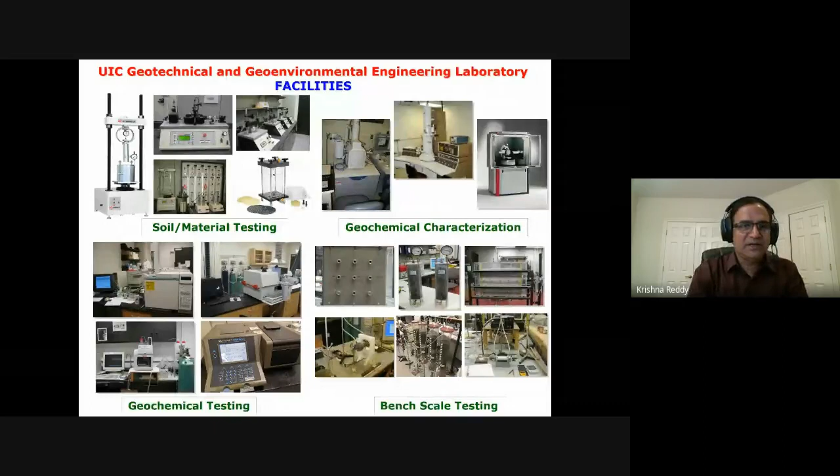This is my lab. We have all kinds of material testing equipment, and all the credit goes to my students. Over the years, I worked with many students from different parts of the world, and their hard work is what contributed to my accomplishments.

So this biochar—I don't know how many of you have heard about it. Biochar is becoming a very popular research topic these days. I just pulled this from Web of Science yesterday—look at the number of publications being published. In 2020, there were more than 4,000 publications on this particular topic, just for biochar, and this number might even increase this year. If I combine the topic of biochar and soil, you'll still see a substantial number of papers, just using Web of Science. If I use Google Scholar, this will be 3 or even 4 times as much.

So the point I wanted to convey is that this is a hot topic these days. And who is doing research? Mostly environmental science, environmental engineering, energy, fuels, chemistry, biotechnologies, and also the world of green and sustainable technologies. So it's a hot topic.

So you want to know what this is all buzz about, right? What is this material, and you want to know something about it. So I want to give you that idea—what is biochar, how it is produced, what are the properties, and what are the typical applications of this material. Then I will go into environmental remediation applications through our research projects. I saw that this conference covers a lot of different fields—you have environmental, water resources, geotech, and everything.

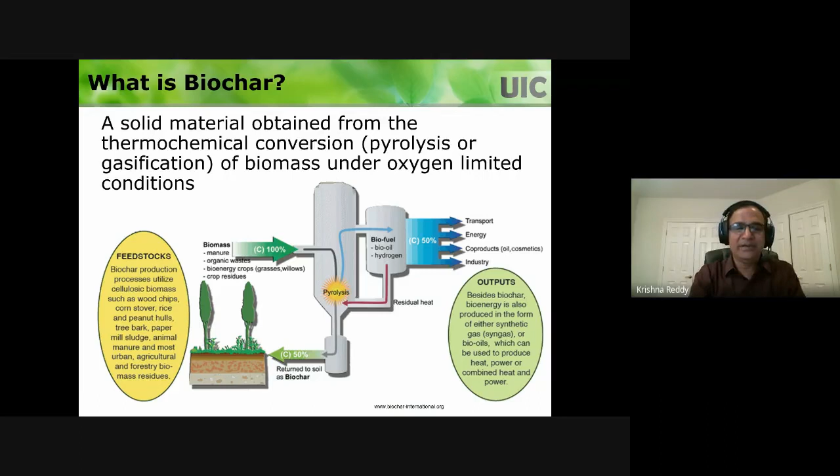Basically, you have a biomass, put it in this pyrolysis unit or gasification unit, and heat it up with no oxygen. So you get a bio-oil or syngas, producing bioenergy, which is good — from the waste, you are creating energy. As a result, you get the so-called biochar or charcoal. But it's not a waste — it's going to be a very useful material for many applications. That's what the focus is.

You can learn more about pyrolysis if you're interested. These are more controlled units — kilns or retorts. You put in your biomass and heat it up under no oxygen conditions. There are two ways of doing it: fast pyrolysis and slow pyrolysis. Fast pyrolysis is high temperature and low residence time. Residence time is how long you keep your biomass in the unit and at what temperature.

So fast pyrolysis is high temperature, low residence time, and slow pyrolysis is low temperature, high residence time. Gasification is another way of creating biochar — you have a vessel and directly heat it up. There is some presence of air, but if you can heat it up while limiting the oxygen, you'll get more biochar out of it.

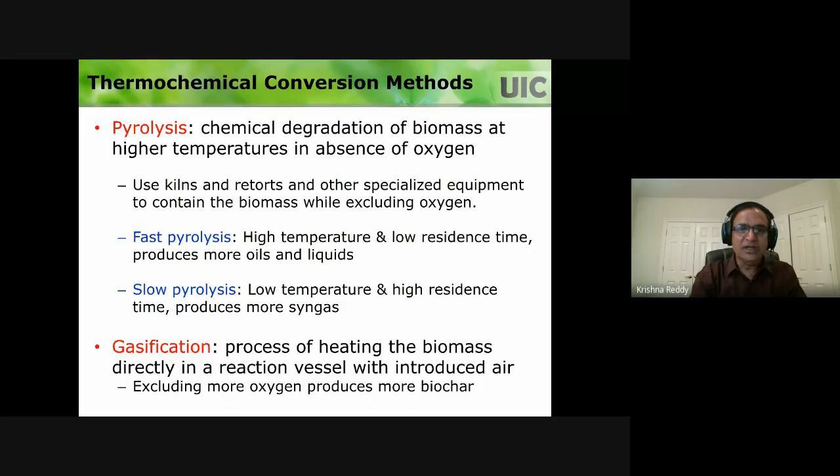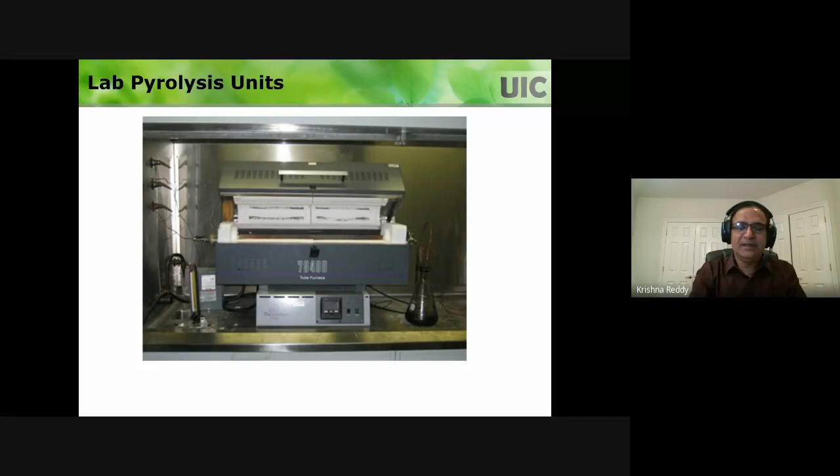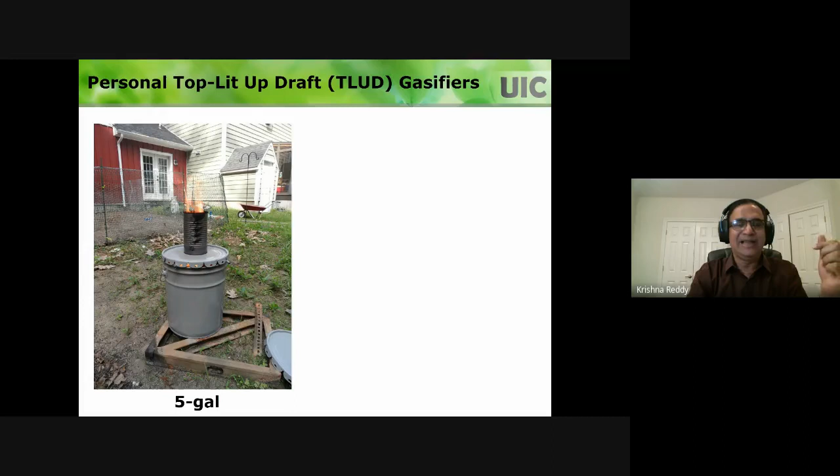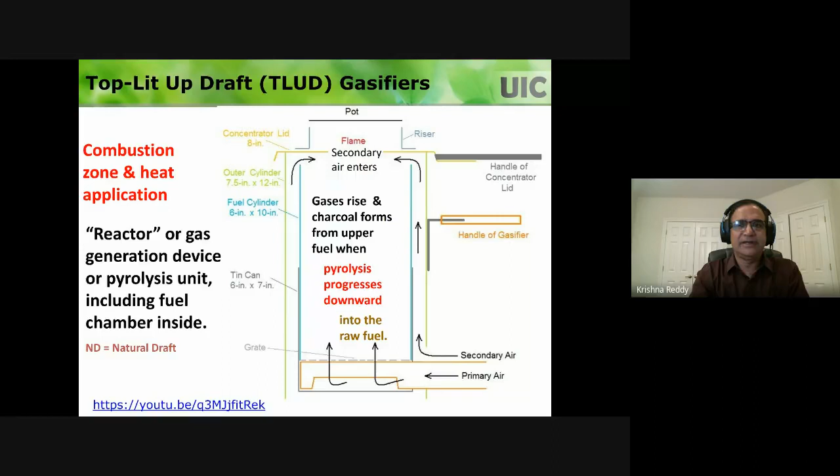You can actually create one yourself — basically it will have concentric cylinders, and you put your biomass inside, then circulate the air and light it at the top. What happens is the biomass doesn't have oxygen, or has oxygen limitation, so it converts to charcoal rather than ash. If you're interested, you can learn about these personal pyrolysis kilns — you don't need fancy equipment. You can make one yourself with basic stuff available locally. This concept is also used for cook stoves.

It's very nice because instead of burning wood and getting ash and a lot of smoke, if you follow this pyrolysis methodology, you get a lot of heat out of it, there's no smoke, and at the end you get charcoal. Charcoal can be used for a lot of other purposes. So there's a lot of emphasis on using this kind of stove in developing countries, and a lot of work going on in that field.

So when you talk about biomass, what are we talking about? Anything biodegradable — literally anything: products, waste, residues. Think about agricultural residues, corn cobs, corn stover, rice husk, rice hulls, peanut hulls, animal manure, yard waste, animal waste, industrial waste, municipal solid waste, any other byproducts that have organics in it. Literally anything that's organic and is a waste. This is the best way that waste can be converted into energy.

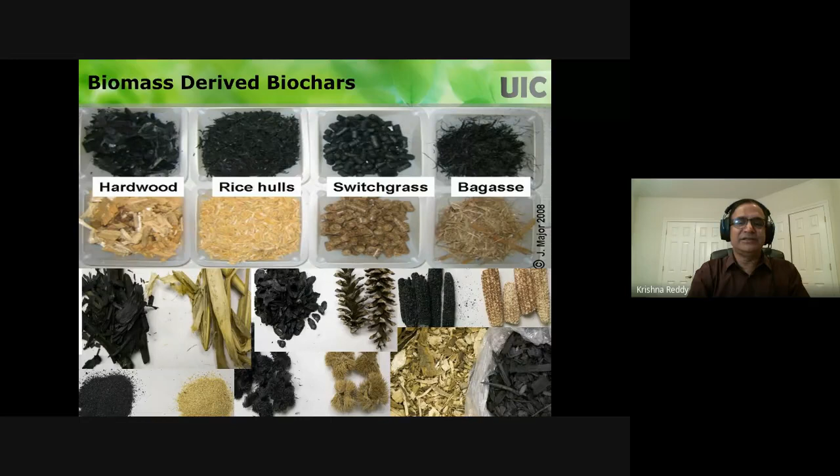These are pictures of your biomass, and the dark black stuff you see is what it looks like after pyrolysis. The problem with biochar is there is no standard biochar — no standard properties, no standard composition. The yield, how much biochar you produce, and what properties that biochar will have, will vary drastically depending on what kind of feedstock you're using and what kind of production process — slow pyrolysis or fast pyrolysis, gasification, what temperature.

These are all the controlling factors that dictate what the end product is. You could literally have hundreds or even thousands of different types of biochar possible. So when you read a paper about biochar, you need to look into the details about what that biochar is all about. You cannot really get the same results if you try to duplicate a biochar that may be different than what the original researchers used. So beware of these biochars — that's the misconception people have. They think all biochars are the same, but biochars can be of many types, so you really need to think about this seriously if you're working on biochar.

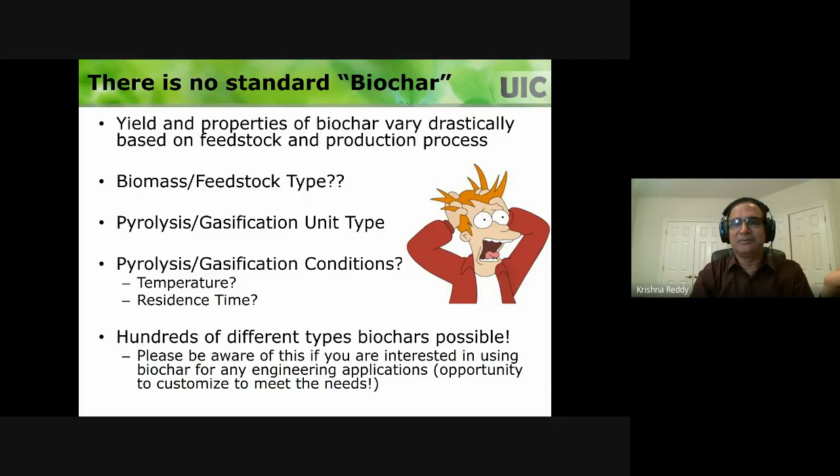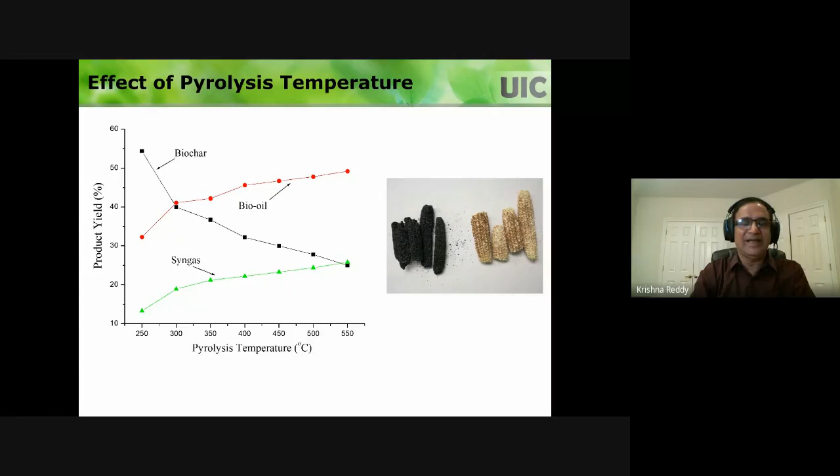Just as an example, I'm showing you the effect of feedstock. If you use different feedstocks with the same pyrolysis process, same temperature, same residence time, you get different yields — that's a problem. And if you increase or decrease the temperature, the yield is going to be different too. When you have these different temperatures and residence times, the properties of the resulting biochar are going to be quite different.

So the first thing you need to do, if you're interested in researching biochar or using it for any application, is to characterize it. In our research, we focused on waste wood as a feedstock, and also on commercial production, because you can do lab-scale generation of biochar, but that's not realistic since in civil engineering applications we need large quantities. When you want large quantities, you have to go to commercial plants.

So we really didn't want to do anything with producing biochar in the lab. So we wanted to use commercial facilities to obtain our biochar from there.

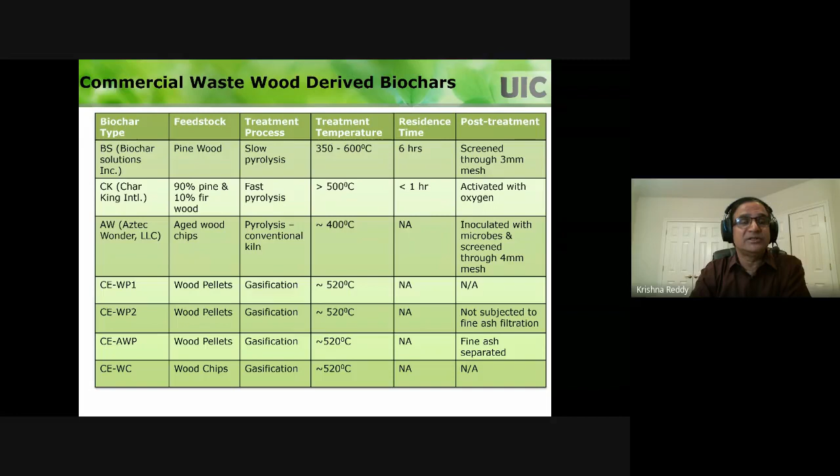We found sources where they use pine wood, waste wood, as the feedstock. We don't have any control on how they create this biochar, but we got some information from these commercial producers on what the conditions are. Then after they produce the biochar, sometimes they post-treat it, so you have to look at that too.

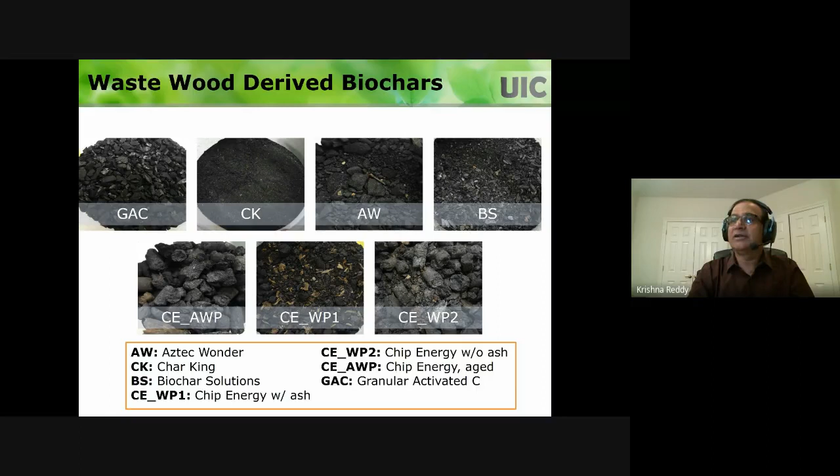These are the biochars from the same waste wood, and they look different in terms of appearance. So look at this. Also for comparison, I put a granular activated carbon here so you can look at how they compare.

If you want to characterize them, you can follow the standard ASTM methods to know the physical, hydraulic, and chemical properties. You can do SEM imaging, and then more detailed porosity and surface area analysis. We're all familiar with these things.

You can do grain size analysis, and the sizes can vary significantly depending on how the biochar is made. What I'm trying to show here is the same biomass, waste wood, but different commercial producers following different production processes. You can see the specific gravity being different, water holding capacity different, organic matter content different, fixed carbon content different.

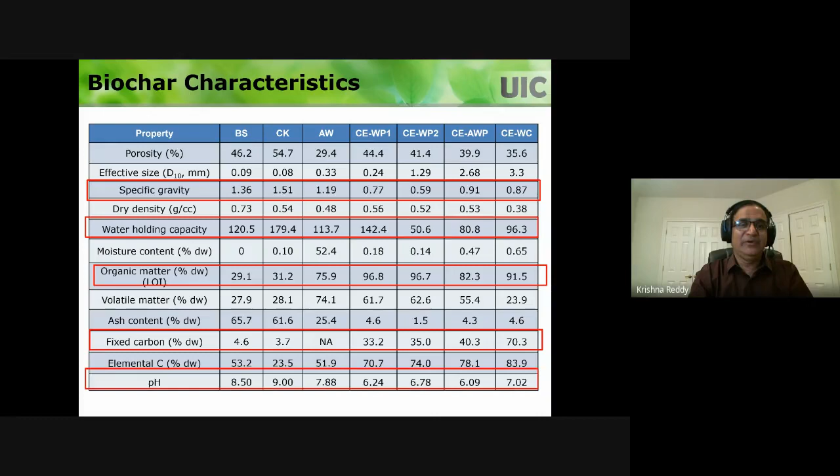You really need to pay attention to these variations. Even though the biomass is the same, the production processes are different. Here, the water holding capacity, one of them has 180%, the other has hardly 50%.

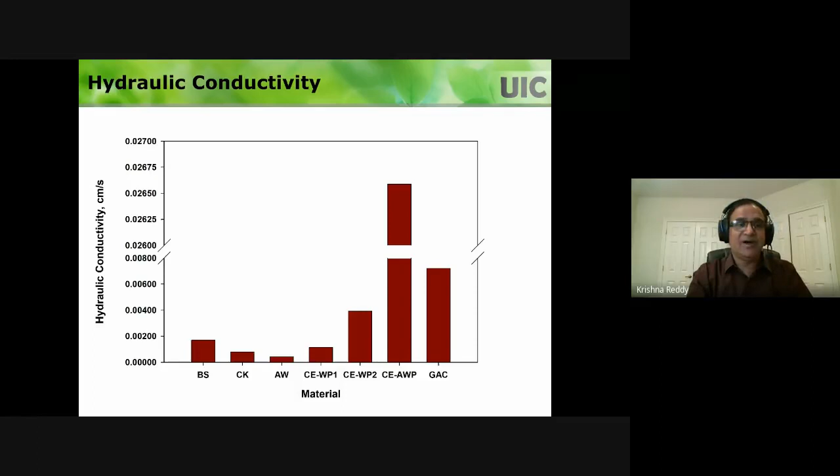Hydraulic conductivity: generally they are more like granular type material, so they will have high permeability. No matter which biochar you're looking at, hydraulic conductivity is very high.

You really need to look at what is the water content, what is the volatile matter, what is the ash content, what is the fixed carbon. What you have to look at is the biochars that have more fixed carbon, those tend to be the better biochars.

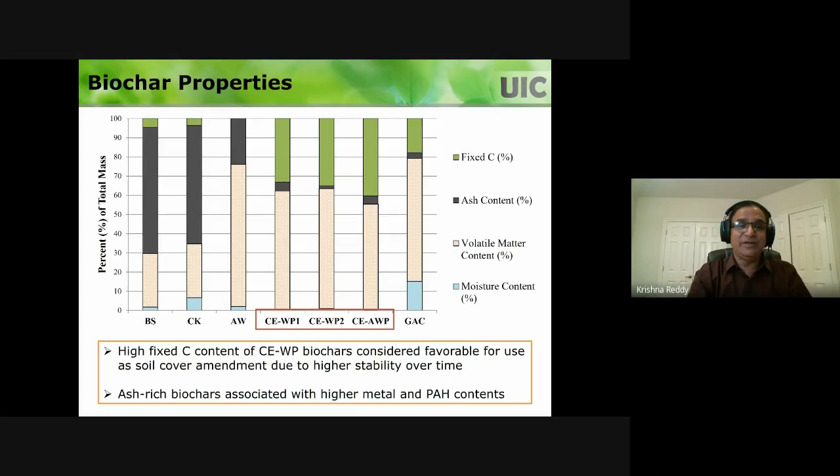If you have more ash, like you see, those are dangerous. They could have a lot of contaminants, metals and PAHs that a lot of people don't pay attention to.

You really need to characterize the chemical properties such as pH, ORP, electrical conductivity, zero point charge. But more than that, you need to also characterize what kind of toxic metals and toxic organics they have. That's very important because you don't want to use a toxic material in your application.

A lot of times you assume your material is inert, like if you're using sand, gravel, or clay, you're not concerned about these contaminants. But when you're using biochar, depending upon the biomass and the pyrolysis conditions, you're going to have these contaminants, and you need to characterize those things.

A lot of times you may use this biochar by mixing it with soil in your applications. When you have a soil with certain properties, you add biochar in different amounts, let's say 2%, 5%, 10%. Generally we go maximum up to 20%, and you are going to change the characteristics of the soil. For example, organic content is going to increase.

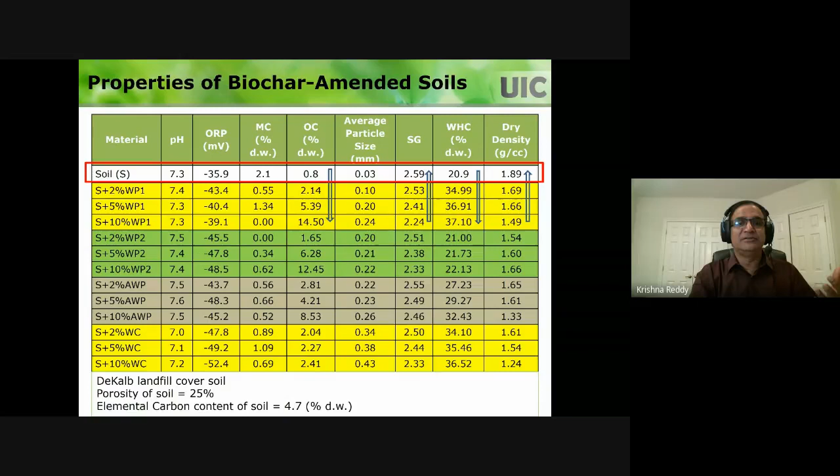On the other hand, biochar is a lighter material, so your specific gravity is going to decrease. Water holding capacity is going to increase, so dry density is going to decrease. So you're changing the properties of your soil, and it depends upon which biochar you're using. Again, those properties will change.

Geotech people love characterizing the geotechnical properties of biochar and biochar amended soils. You can do the Atterberg limit test, you can do compaction tests, and you will find some strange results with these things.

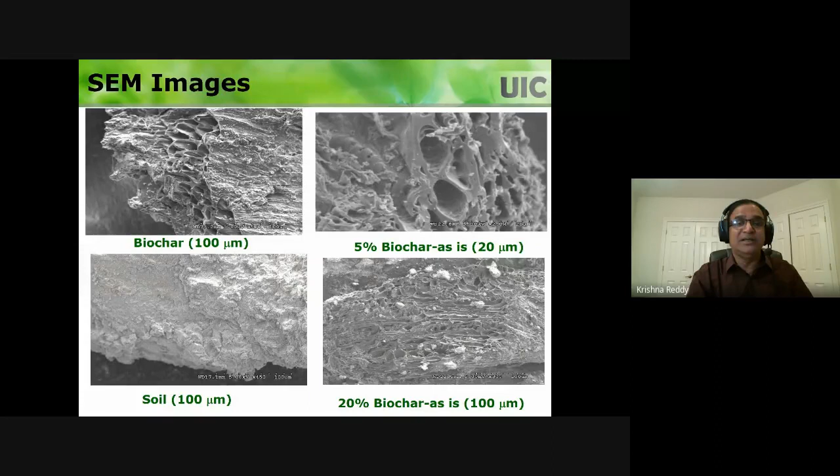When you add it to the soil, you're going to create that internal porosity that you would not have with the soil alone. And hydraulic conductivity: if you're dealing with a clay soil, hydraulic conductivity may be low, but when you add this permeable biochar, hydraulic conductivity is going to increase.

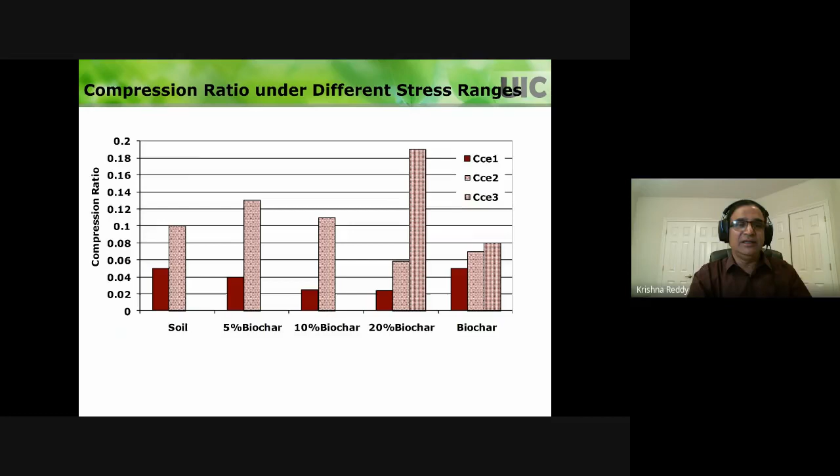So you need to really pay attention for your applications. In case of compressibility, generally biochar is more compressible than the soil.

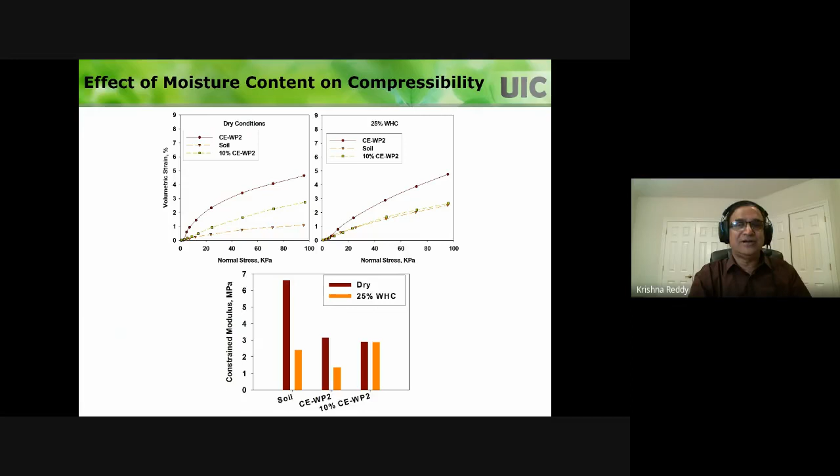In terms of shear strength, surprisingly, biochar has a higher shear strength, and even if you add this biochar to the soil, the shear strength is going to increase. That's a positive aspect. But moisture content makes a lot of difference. If you test dry biochar versus moist biochar, you will get different results. Generally, when you have moisture content, the strength is going to decrease. So you need to have those properties at hand when you think about biochar applications.

And there are many biochar applications. Agricultural applications are very common, so it has been used extensively as a soil amendment in agricultural fields. That has been going on. But just recently, a lot of attention has been drawn to environmental applications and also infrastructure engineering material applications. So soil-based stabilization, you can add it even into concrete. You can think about anything you want to do with this material. But the applications depend upon matching your application needs with the composition and properties of biochar.

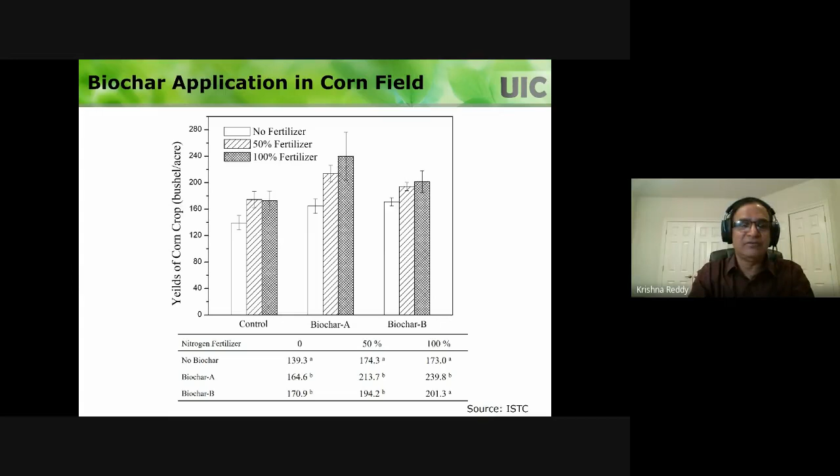So biochar agriculture application is very straightforward. You just basically go to the field, add your biochar to the soil, and grow your crop the regular way. Then at the end, depending upon the biochar that you use, your crop yield is going to improve. This has been going on, and the farmers love it. So the major applications of biochar so far have been in farming.

But as I said, this material being unique with a high internal porosity, a lot of people are starting to look into these environmental applications and infrastructure applications. We have been working on this for many years. We did some projects on nutrient removal from wastewater and stormwater treatment, contaminated soil remediation, and fugitive landfill gas emissions. All these applications become sustainable because you're using biochar, which is a sustainable material. You're doing waste reduction, conservation of resources, pollution control - all those benefits you get. So truly, whatever you do with biochar should eventually lead to a sustainable solution.

So I want to show you just a brief glimpse of these research results. I'm not going to go into details, but hopefully you can get more information from the publications that I have. There are many studies in the literature that look at using biochar to remove nutrients and other types of contaminants from wastewaters, using biochar as the adsorbent.

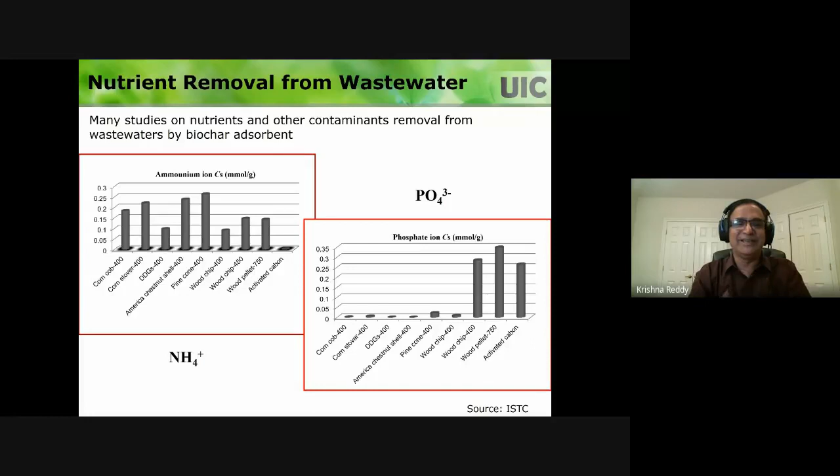I want to show you this one. Ammonium is the one that people want to take out, and depending upon the biochar, you can take out different amounts of ammonium. Activated carbon is not doing a good job, but your biochar is doing a good job - that's the advantage. And phosphate is hard to take out, but you can find biochars that can do it. So don't give up - if you have a biochar that does not work, you could think about another biochar that could do this thing. You have a lot of flexibility because you can create many different types of biochars, and hopefully one of them will work.

So if it works, then you need to look at the kinetics - how much time it takes to uptake the contamination - and also what is the maximum capacity that it can take. These are the things that people have looked at.

And our project is kind of interesting. I had a student from China who is interested in looking at biochar, and we created this project for him: why don't we use the biochar to remove the nitrogen, phosphorus, and potassium? These are the kind of nutrients you find in wastewaters. Phosphorus is the one which is hard to take out by biochar, so we wanted to add MgO, magnesium oxide, which combines with phosphate and forms struvite. We wanted to look at a combination of biochar to remove these other nutrients, and for phosphorus, maybe we can use this MgO.

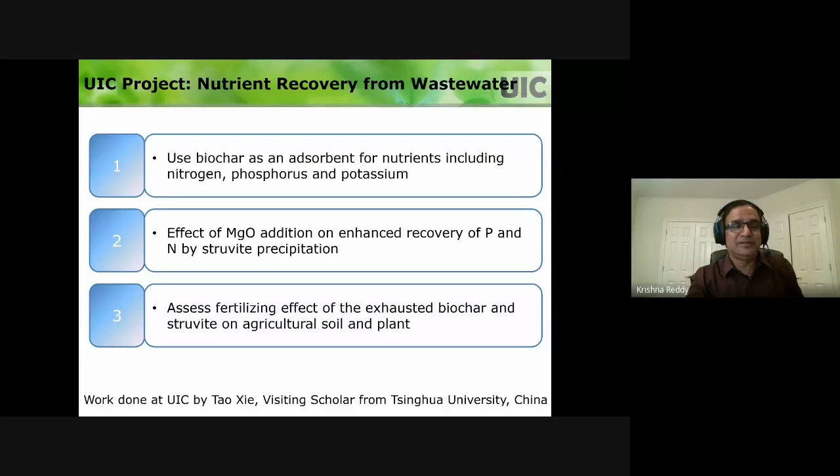Maybe once you have this material absorbing all these nutrients, why don't we take that and spread it in the farm fields? Now you are using this biochar with a lot of these nutrients, and you're going to get a large amount of crop if you use this situation. So that's what we wanted to see, if this is feasible or not, because if you use the biochar just like that, you can get some benefit, but not as much benefit.

By doing this, you are removing the contamination from the wastewater, you're cleaning it up, and also you are using the biochar with nutrients in farm fields that can give you huge yields.

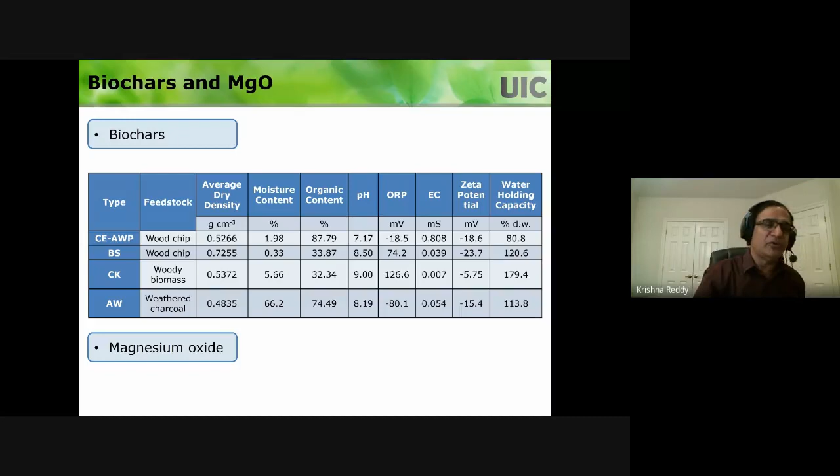In the lab we use synthetic wastewater. We looked at different types of biochars that I mentioned before, all wood-based biochars, and we looked at magnesium oxide to form struvite. I don't have time to go into the chemistry of this struvite precipitation, but if you add magnesium oxide, you get these reactions and form this precipitate.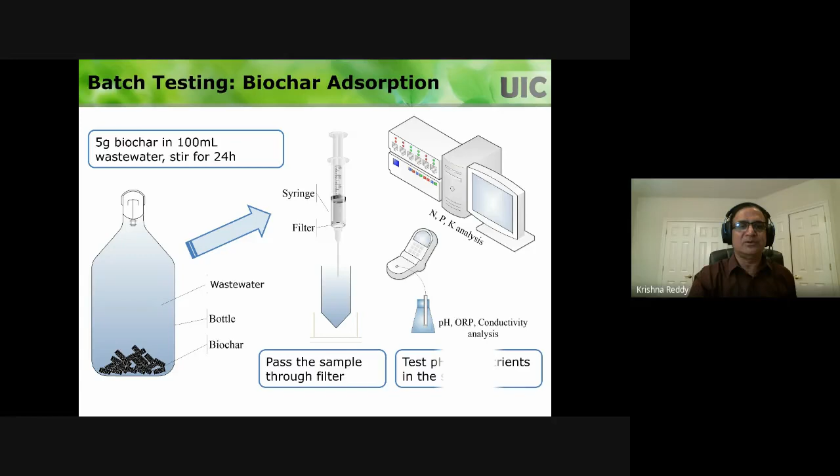Our experimental procedure is very simple. Basically, you take the wastewater, add some biochar and mix it, then take the solution and see how much contamination is reduced. Because some of the contamination gets adsorbed onto the biochar, you'll have less in the solution, and we analyze how much reduction you have.

When we want to add magnesium oxide, we do the same thing. We add biochar and magnesium oxide and look at the concentration.

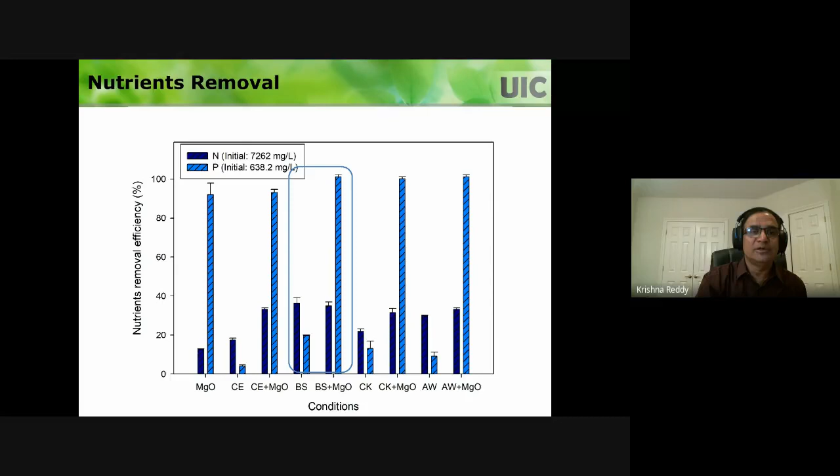So here are the results. If you look at magnesium oxide alone, you can take out the phosphorus, but for nitrogen you need the biochar. Based on these results, biochar BS and BS plus MgO are found to be very efficient in taking out both nitrogen and phosphorus. Then you can optimize what should be the ratio of biochar and magnesium oxide, since we're going to use both, so in what proportion can be optimized.

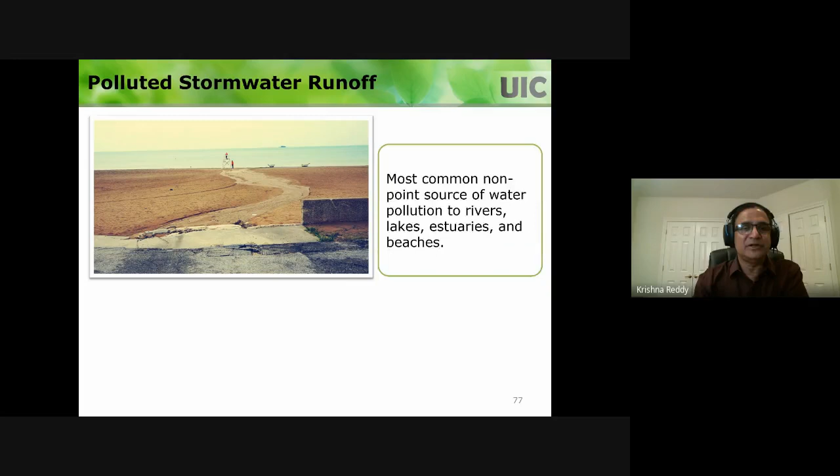The stormwater in cities is a huge problem. When it rains, all the contamination from the roads and everything goes into these waterways. In Chicago, we have this lake, and all the contaminated surface runoff goes into the lake and contaminates it. This surface runoff can have a lot of different types of contaminants.

So the idea is, can we have an in-ground filter system that water can go into, and then you have clean water that can be discharged into the lake. In this case, what kind of filter media do you need to use? Our question was, can we use biochar as a filter media?

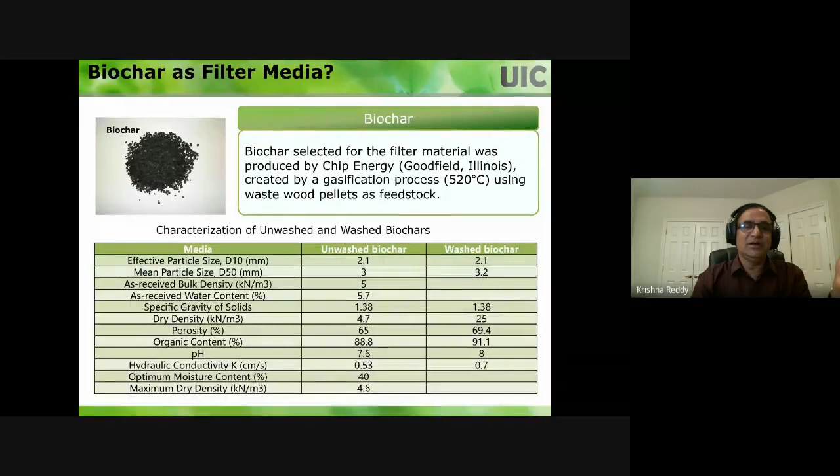So we tested this on a synthetic stormwater that contains nutrients, metals, PAHs, and even biological contamination, E. coli. Basically, we do column experiments, which kind of simulate the filter response. We can look at how much you're putting in and what is coming out, and based on that, calculate how much of the contamination is being removed.

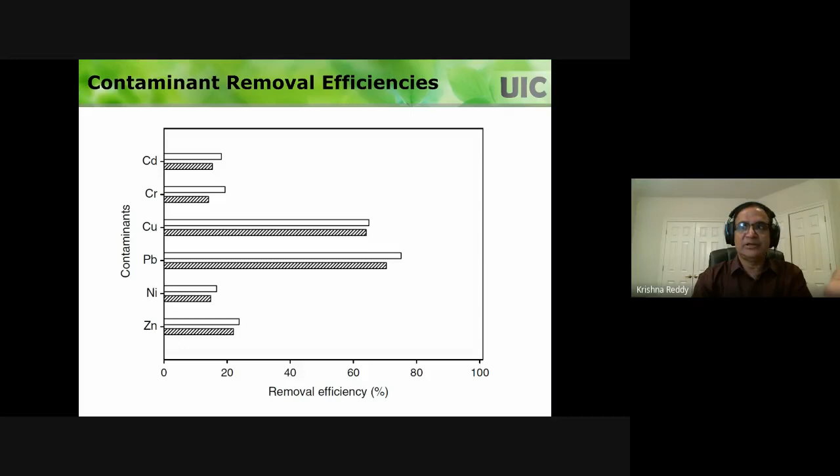So you can see it can remove a lot of different contaminants, which is really good. Among the metals, some are removed more, some less, but the removal efficiency of this biochar is very substantial, which is really good for using it as a filter material.

In case of remediation of soils, one of the techniques we use is phytoremediation, basically growing plants so they can uptake the contamination from the soil. They can stabilize the contamination within the soil in the root zone.

But it does not always work. Sometimes the plants don't even grow because the soil or fill material may not have enough organic matter, moisture, or nutrients. Or if the contaminant level is too high, it's toxic to the plants and they don't grow.

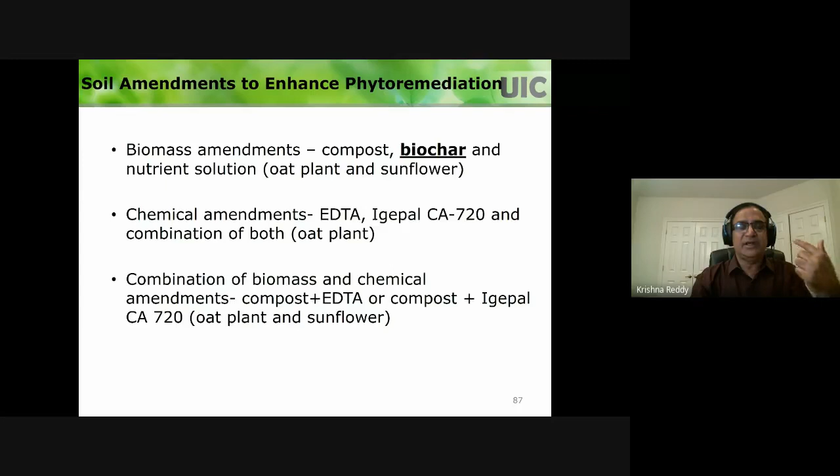So our research was to see if we can use any amendments to the soil that can solve these problems. Out of all these different amendments, I'm just showing the results of biochar. Biochar has a nice water holding capacity and nutrient capacity. We did the pot test and found out that biochar can actually create favorable conditions.

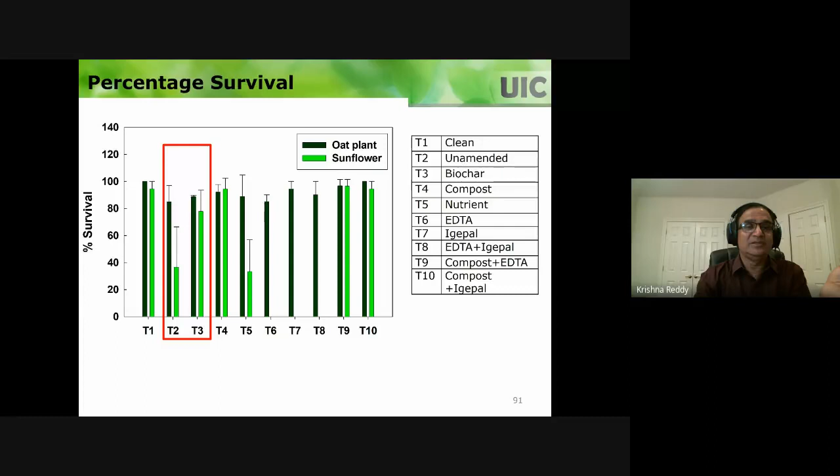For one plant there wasn't much difference, but for the other, sunflower, look at that one. If you don't amend it, germination rate is low, but if you amend with biochar, germination rate increases. So what about survival once germination happens? The survival without amendment is low, but with the biochar amendment it's high.

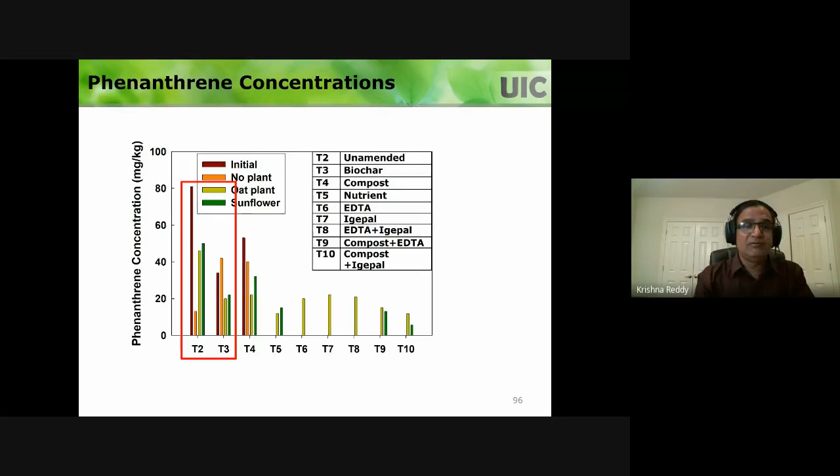If you look at T2 versus T3, you see generally there is some reduction in the contamination levels too. T3 reduction is due to some biological activity. So this biochar is a great material for enhanced biological conditions, and then you can get reduction in these things.

The last application I want to show you is fugitive landfill gas emissions, because as waste degrades in dumps, all the gases try to come up. If you have a gas collection system, parts get collected, but parts get released. If you don't have any gas collection system, like in India where you have dump sites, all the gases come up into the atmosphere. Even if you put a soil cover, there may be some methane oxidation due to bacteria in the soil, which is really good. Methane is a greenhouse gas, and reducing it is very important.

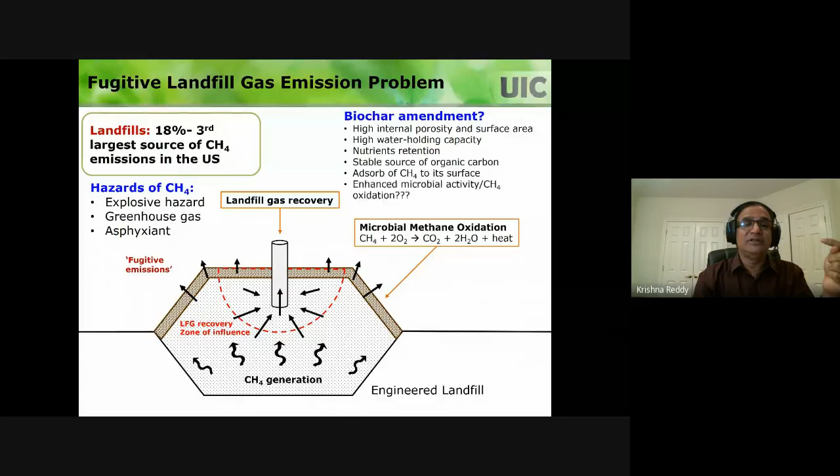Now the question is, since soil does not oxidize too much methane, can we add biochar to improve that methane oxidation? Why is biochar important? Because it has high internal porosity, water holding capacity, nutrient capacity, and it's a stable source of carbon. The carbon in biochar can last for thousands of years - nobody knows exactly how long. Unlike compost, which can degrade really fast, biochar can adsorb methane, and because of all these factors, it creates a nice environment for microbes to reside.

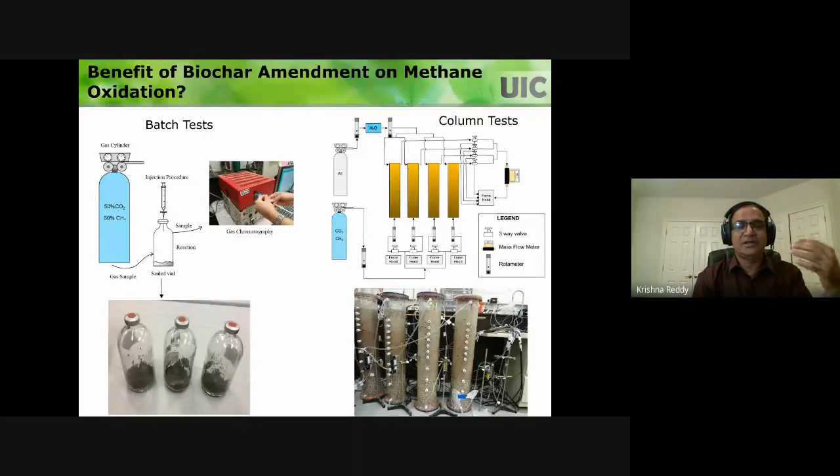We've been doing research to characterize how much benefit we get by adding biochar. We do a lot of batch tests and column tests, and through all this testing we've shown that biochar actually helps enhance methane oxidation. We try adding 2% or 10% to the soil, and that can dramatically change the oxidation rates.

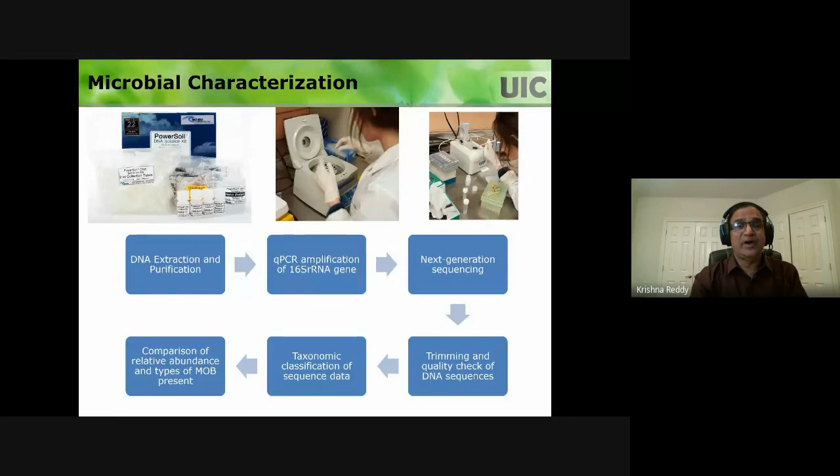In the column test, we simulate by creating the column, put in the biochar amended soil, and test it. We find that the biochar amended soil has excellent methane oxidation potential. Why is this? Because a lot of it adsorbs the methane. Not only that, in the long run, biochar provides a nice environment for microbes to thrive in its micropores, and you can see a lot of microbial activity as a result.

We've also done field testing to demonstrate how it works in real field situations. A lot of these results take time to explain, but the idea is that biochar can be used beneficially for all kinds of applications. Our ongoing project not only looks at methane conversion into CO2, but even sequestering the CO2 or H2S gases using a slag layer on top - basically achieving zero emissions coming out from the landfill.

So you could do simple things like this on dump sites where you have a lot of H2S and odors - you can go there and put a biochar amended soil layer. Even a thin layer will solve the problem.

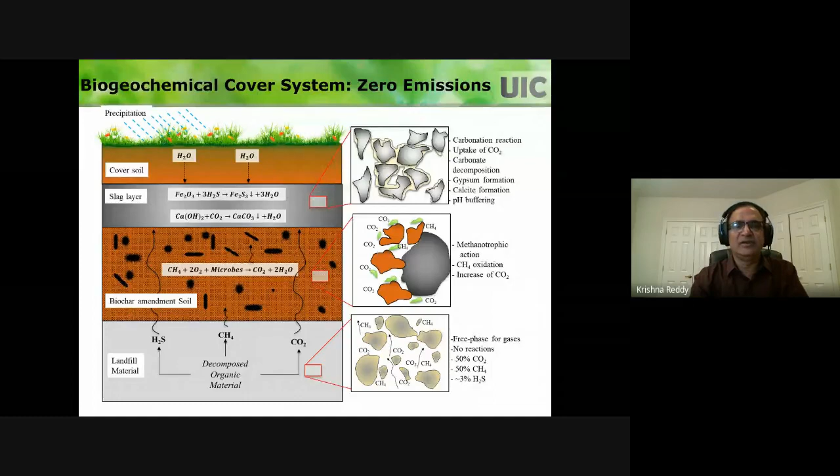If you're interested, as I said, a lot of people are working all over the world on biochar. Biochar is a stable carbon material produced from biomass - it's a waste product from bioenergy production, and you want to have alternate energy, right? So bioenergy is a good sustainable way to have alternate energy, and it's all leading to good things. So the material biochar is a sustainable material. But I cannot overemphasize the importance of realizing that not all biochars are the same. When you read a paper, a lot of times they just talk about biochar, biochar, biochar.

But what is that biochar that they are dealing with? You really need to look at it, because the properties of the biochar vary depending upon the feedstock and pyrolysis and gasification conditions. And also you need to look at whether they created the biochar in a lab scale pyrolysis unit, because the quality of biochar there is different than commercial production. So detailed characterization is very critical.

A lot of times you may do geotechnical and physical chemical properties, but one important thing I want to emphasize is the contamination content. Please, if you work with any of these materials, try to see if it is toxic. You don't want to work with a toxic material even in the lab, with the dust and other things that could happen. So in our research we screened a lot of different biochars, even based on waste wood, and for some of them we found really high content of metals and PAHs, and we discarded those.

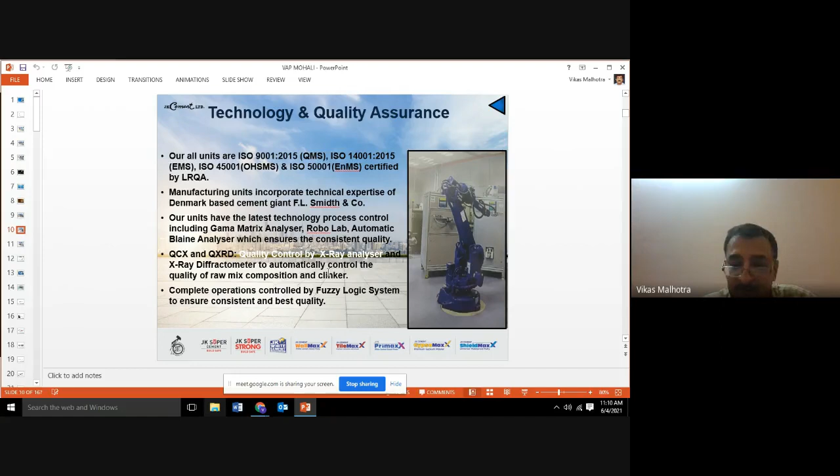The company has world-class cement manufacturing technology. We are in technical collaboration with FL Smith, the world leader in cement technology, a Denmark-based company. We follow all quality standards - ISO 9001 and 14001, regarding quality management systems and environment. We are following all these systems.

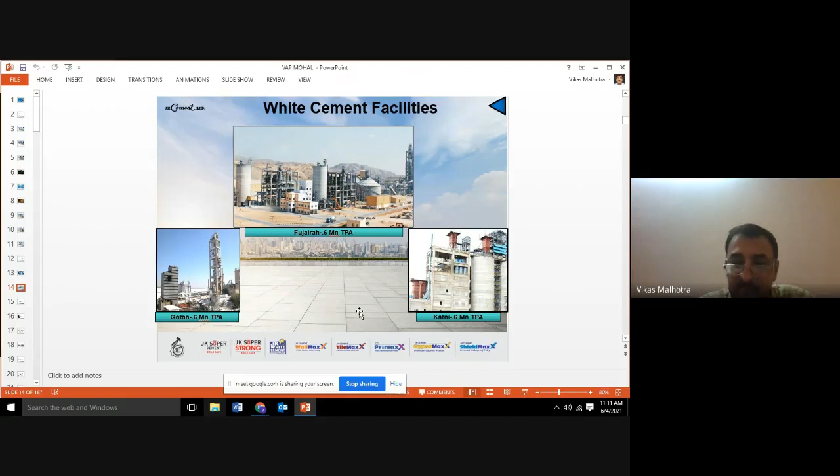Before I move into the cement-based products, I will give you some facts about the cement industry, cement scenario, what we are, and how we have evolved over time.

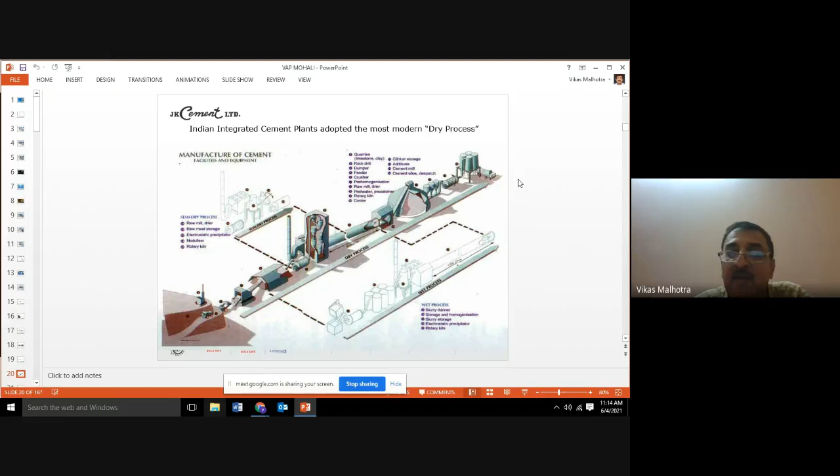So this is the entire process for cement manufacturing.

I call cement a magic powder, a very flexible material. You can cast whatever you want. This slide we have already discussed.

Now, friends, this is the per capita consumption of cement in various countries. In India, we need to do a lot more — we are even less than half of the world's average per capita consumption. The world's per capita consumption is 270 kg, while we are at only 120. So a lot of things will happen in the coming days.

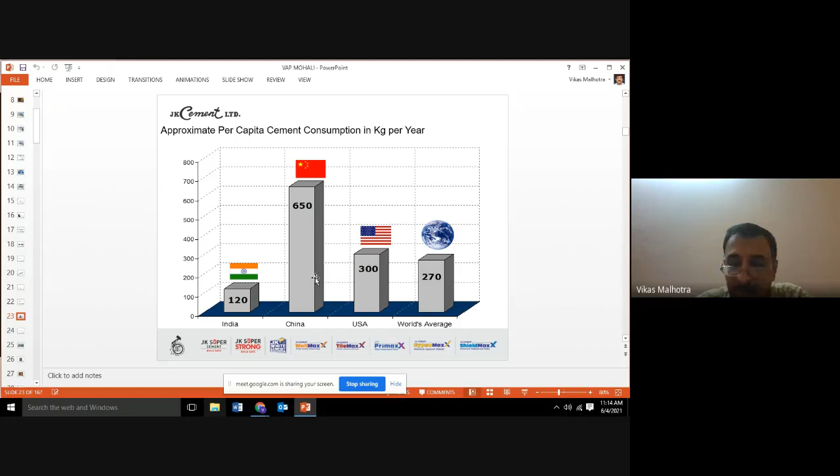Now up to this point, the cement manufacturing process is the same for any type of cement, whether it is OPC or PPC.

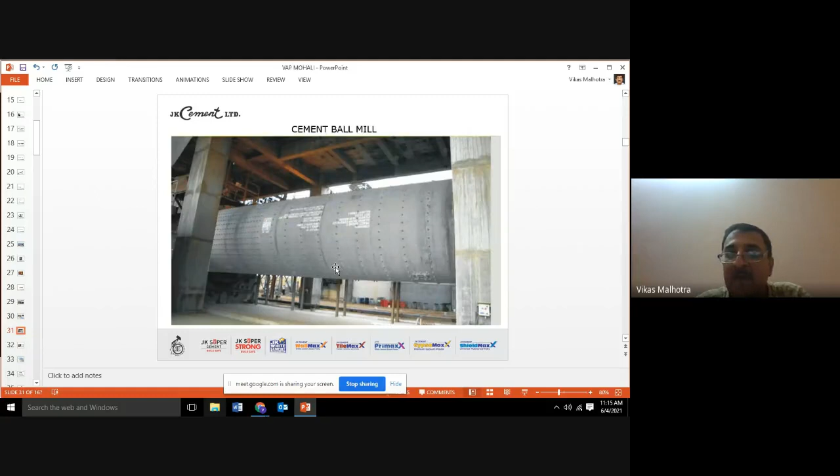Now coming to the actual topic, I would repeat today's topic: it can be called dry mix mortar or value-added cement-based products — it's one and the same thing. Basically, we have been using the same cement for all applications, as I've described in the previous slides.

So that cement basically has some good properties. The basic property we look for in cement is its strength and good binding power.

Looking at that, we have extended its use for all kinds of applications — laying bricks, plastering, fixing tiles while constructing buildings. But each of these applications, we have realized over time, requires a different kind of product. So for that, we have formulated different products under this umbrella branding of Max.

You will see each of my products ending with Max — PrimaX, Shield Max. These are all written at the bottom of these slides. Max basically means maximum strength and quality, we say.

Now, introduction to dry mix mortars, as I've already given you a brief — basically these are ready mix materials. What is cement? The cement we've discussed, it comes to you in a bag, but it's not a final material. Basically, you are mixing it with some aggregates.

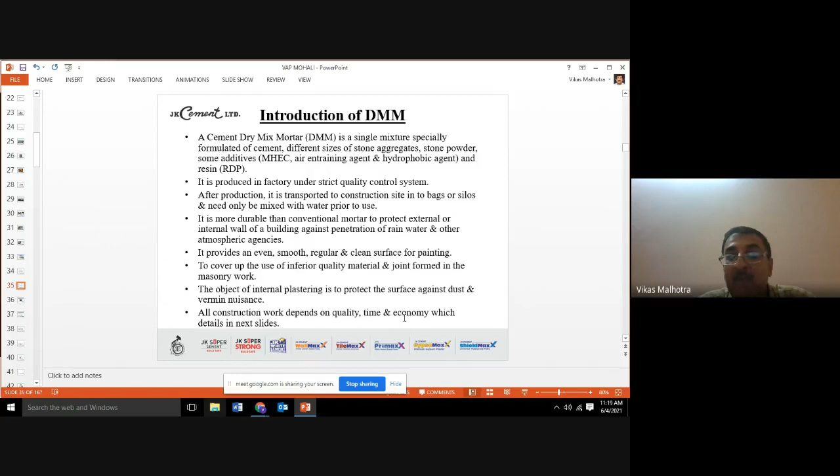Since this is a factory made material, quality is assured. You will save on time and money also using these products. Once I go into detail regarding the market of these products, it's growing with exponential growth. In the coming times, cement will be having a very limited use. You all will be using these specific value-added cement-based products for your construction.

So basically, what are the challenges here - supply chain management, where I need all these things in time with good quality. Customer demands, customer demographics, what is his requirement, what is the volume requirement, that we have to take care of. Then there are political scenarios, legal requirements that we have to take care while coming up with this product. And of course, our sustainability in terms of environment and technology.

That is all we have to see before I come into this. Now, dry mix mortar, as I have told you, if we talk of US, the growth was around - in these 4 years the market has grown by 24.5%. It is not as much in India, but in the coming time it will grow like anything.

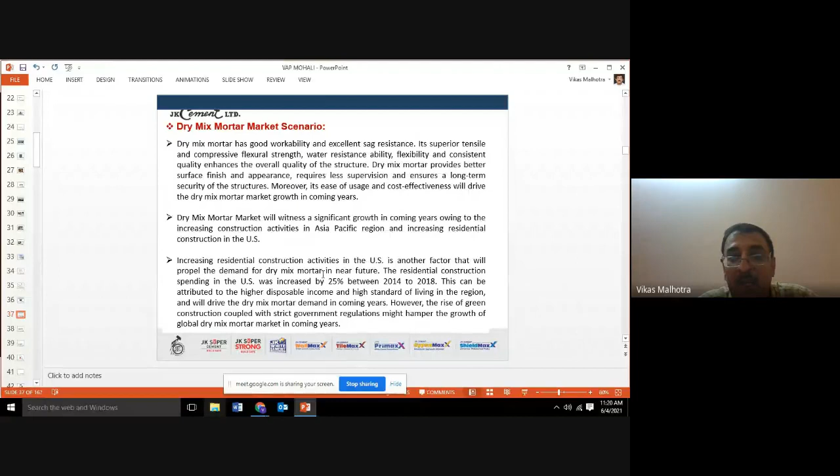Now what are the advantages? They give us thermal insulation. They are eco-friendly. They help in improvement of industrial structure. Testing of each and every product is ensured because technically we are making it in-house. They are very easy to use.

This is very important, as I have told you, your mason is not educated. He doesn't know how to use the product. Here, if you talk of concrete - normal, simple concrete - there are 4 ingredients in that normally. If you talk to him and ask him to have a proper proportion, I am very sure it is not possible in today's scenario. That's the reason we need all this.

And these all have good water resistance properties - that's a major challenge in all buildings. Now these all have better flexibility, minimum space is required. If you are ordering aggregates for your site, you need a lot of space to place those aggregates. Normally they are laying in open, so that challenge is also met.

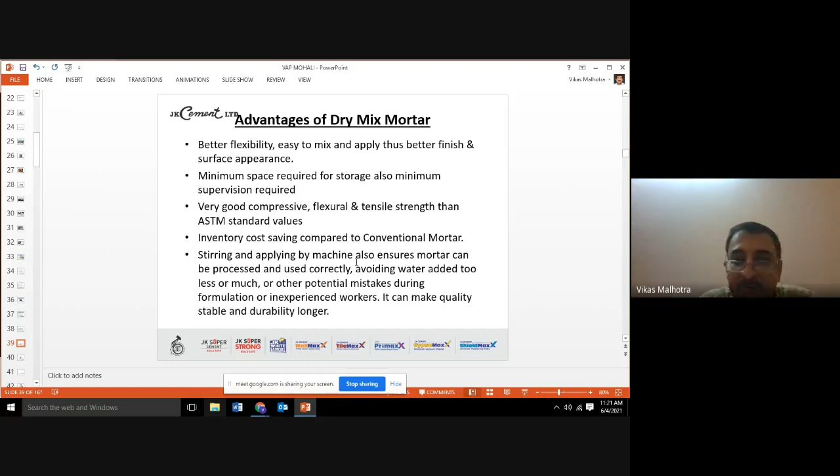They have good compressive and flexural strengths. Inventory cost is saved, and your mixing and stirring and mechanical mixers, whatever you are using at site - those all are done away with, and you don't require them.

Now coming to the ingredients of these products - basically friends, all these products, these are the three major things which are there in each of the product. It can be cement, some aggregates. I have written the word river sand, whereas it can be any other sand also, or some aggregate coarse as well as fine, and then some additives.

Now these additives play a very important role. As I have written, they are methyl cellulose. Basically, different types of additives are required for different types of material.

We'll discuss in detail. Now raw materials - binder, now it is not only cement, it can be gypsum powder also. In some of the products we are using binder as gypsum powder. Then we have RDP, that is redispersible powder, basically for proper dispersion of your mix. And then we have some water retaining agent - these are basically methyl cellulose. And then we have some hydrophobic agents which are added.

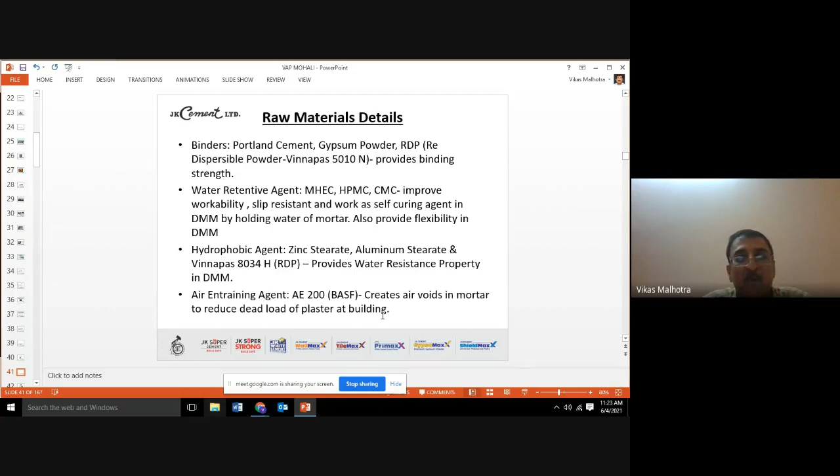These are zinc stearate, aluminum stearate. Then if required, we add some air entraining agents also. So these are the basic components which we are using. Not going in detail, cement you all know, sand has to be properly graded.

We use admixtures, and using these admixtures, I can have this kind of flowable mix under control. Now, there are various kinds of admixtures, as I have already told you. They can be accelerators or retarders even, depending upon the mix you require.

We do give a mix which is used for fixing of your machine foundations. There we are adding accelerators, water repellent agent, depending upon the finishes which are for exterior of your buildings. And these are the basic things which are there in most of my products. Basically, they are dispersing agents to have good workability of your mix.

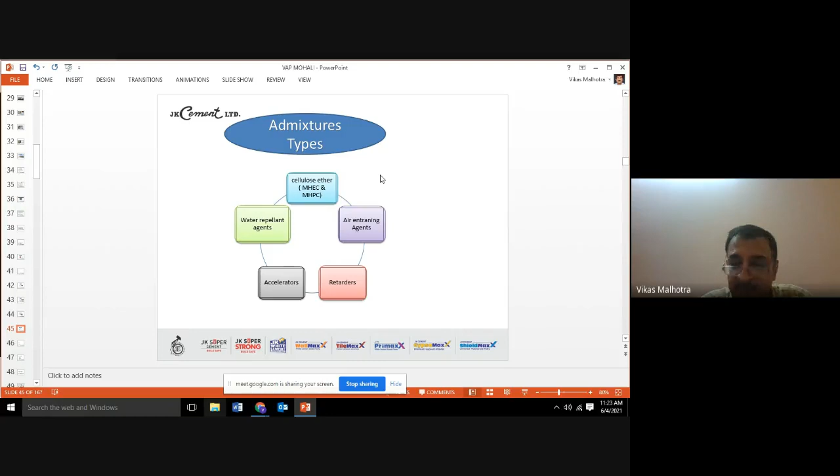Now, where can we use these products? They can be used as a plaster, they can be used as a repair material, they can be used as a tile adhesive and in tile grouts. I have a tile adhesive and a tile grout - these are two different materials. External thermal insulations and self-leveling screeds can be made under this category.

Brick fixing mortar - I have written brick or block. Most of the time today, brick is being replaced with block. We are using AAC block or fly ash bricks. Friends, if you are using fly ash bricks or AAC blocks, you need not go in for your traditional cement mortar to fix those, because the whole thing is gone. If you are again wetting your blocks, that is not recommended. You have to use material which doesn't require curing. So special block fixing mortar is available from many companies that has to be used for fixing of your blocks.

Cementitious waterproofing compounds, epoxy grouts, skim coats - these are all various dry mix mortars. The advantages, I have told you many - easy to mix, better flexibility, you will save on time, you will save on inventory, you will save on curing cost. That is very important. Most of these products which I will introduce you to today don't require any curing. We have added some chemicals into it which retain the water in the mix, and you don't require curing after hardening.

Now, basically, what are the needs for these value-added cement-based products? These were the four basic needs which pushed us to launch all these products. Basically, we need to save on time. We need to have products which are durable. We need to have ease in application.

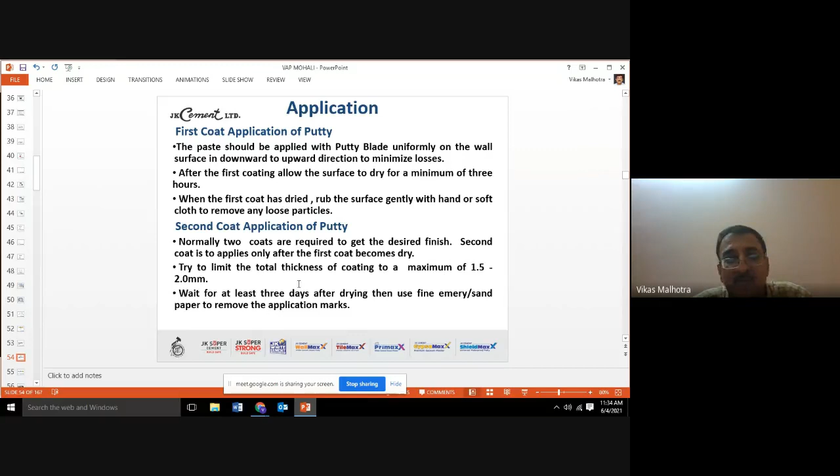And pot life of this product is 2 to 3 hours. Once you have mixed the material, it has to be consumed within this time. And normally we apply it in 2 coats, very easy to apply. The average thickness of 2 coats is 1.5 to 2 mm. This is white in color.

If required, you can add any stainer. Regarding costing, this is very important because engineers normally restrict up to quality. Here I have gone a step further to let you know the costing also. It's a simple mathematical calculation.

For each of my products you will get this kind of slide. This is the per bag cost of my product, approximately 450 rupees, and we have applied it on 100 square feet area, and it is just a mathematical calculation. The only thing we should keep in mind is that here the material cost is roughly 2 rupees per square feet, and 2 rupees 50 paisa is what the labor which I have taken, and the overall cost is 4 rupees and 50 paisa. This we must know while we are recommending any product at any project. We should have idea of this thing, and I will refer this thing in further slides also.

Now, to talk of application, many slides I can show you where this product has been used. As I have told, we are world leader in this product. So now this has been

specified in the schedule of CPWD. This is an extract from CPWD schedule of rate. CPWD is a central government authority for construction of government buildings. They normally follow CPWD schedule of rate. So in that also, at 13.80, they have written this product as white cement based putty with the average thickness.

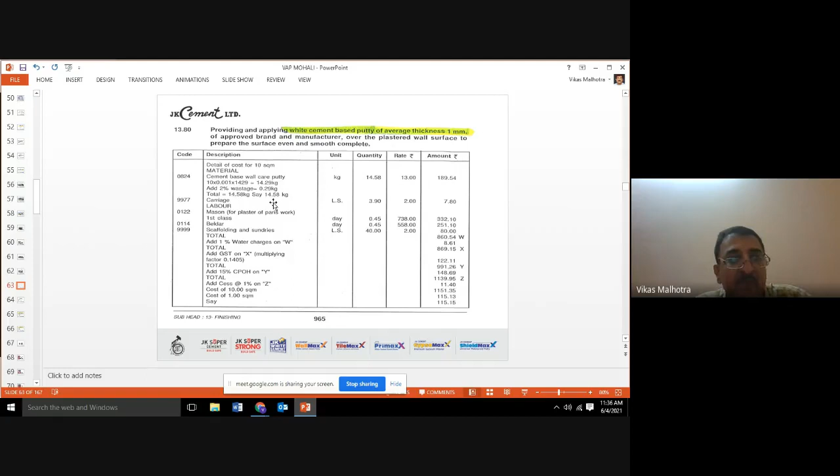They can't write a brand name because they have to be neutral. And there they have calculated in detail, and their costing is 115 rupees and 15 paisa per square meter. They have included, because it is a bit higher than what I told you, the reason is they have even included the GST, water charges, wastage, everything. So it's a very detailed thing, even the margin of contractor.

Now the next product is Shield Max. This is, as I've told you initially, an enhanced version of your Wall Max, where we have added this silane now to improve its waterproofing properties. This is SiH4 molecules, basically silicon molecules, and they form a very highly integrated gel in this material once you add water. And that integrated gel won't allow water to penetrate through it.

So that's the beauty of this product, that it will be to a larger extent, you can say it is a waterproofing material, moisture resistance, low water absorption. Efflorescence normally comes with water only, so if I have taken care of water, efflorescence won't be there. Multi-purpose application, it resists dampness. It has good water repellency, longer paint life, and it is ideal for both new and old surfaces.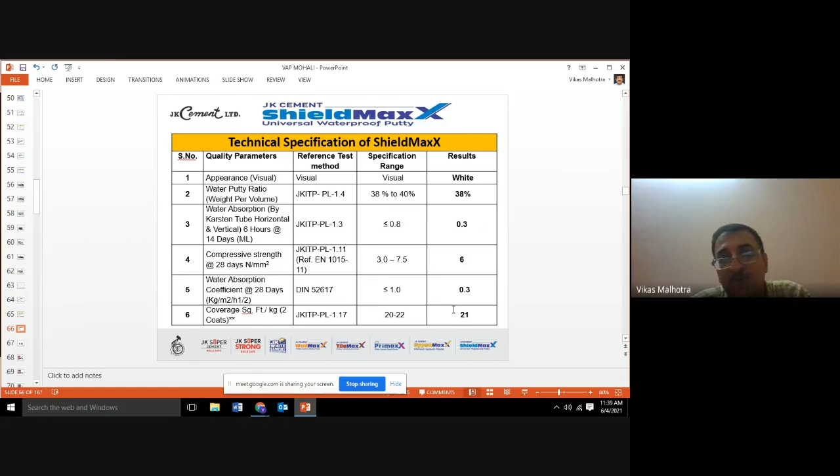How to apply? Very easy. You just have to clean the surface, make the paste, do some repair work, and you can apply it. Now these are the various tools which are used to apply. Very simple things, surface preparation, you just need. Actually friends, this product should have direct contact with the cementitious surface. So anything in between, it can be dirt, grease, old painted surface, that has to be removed. Only then you should apply this product.

This is how we make the paste. This is a mechanical stirrer being used. 38% water we have added. And once you have made this material, it has to be used within 1.5 hours. This is how we apply this material. It can be with the help of this thing or a putty blade.

Now, what are the 4 major advantages of using Shield Max over Wall Max? It's damp resistance, efflorescence resistance, longer paint life, and this is suitable for all kinds of walls. When I say all kind of wall, means exterior, interior, both.

And now friends, this is regarding costing of this product. Here you can see in Wallmax, if you remember, the rate per bag, which is of 20 kg here also, there also, so it was 450 rupees. Now it is 900 rupees. Now the rate of bag has gone, there's a 100% increase in rate of bag.

But if you see square feet costing, it has increased only by 10%. Why is it so? Because coverage has also increased over Wallmax. That was 4 rupees and 50 paisa per square feet. This is 4 rupees and 80 paisa per square feet, roughly 10% increase, you can say. This is a simple mathematical calculation.

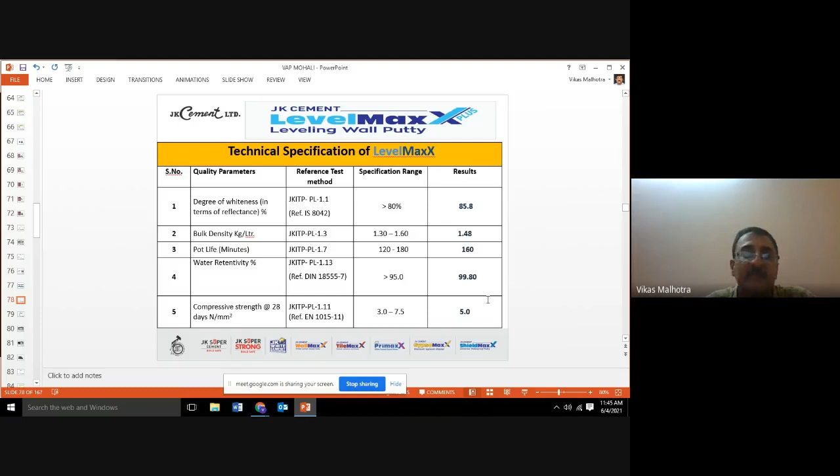So bulk density is 1.48, pot life is 160, and water retentivity is very high. When I say high water retentivity, it means it will be acting as a good waterproofing membrane also - it won't allow water to penetrate through it. So if it won't allow water to penetrate, that means this can be used both at interiors as well as exteriors. You can see the strength - if you compare it with normal plaster, normal plaster has a strength of 3 MPa maximum, whereas we are giving more than 5 MPa.

Now this is very much comparable with your traditional plaster - traditional plaster you have been doing at almost the same rate. So the only thing is awareness about the product. Where you have saved, the money is almost the same or a little higher you can say. But where you have saved is on curing cost, you have saved on time - no curing, no extra time. You have saved on labor. You have saved on the neatness of your site.

So here I will show you some photographs of this product. This is a sample applied on blocks - see how neatly they have done. Otherwise, if you want to go in for plaster, they will do curing, then they will do a number of things. So it's very easy to apply.

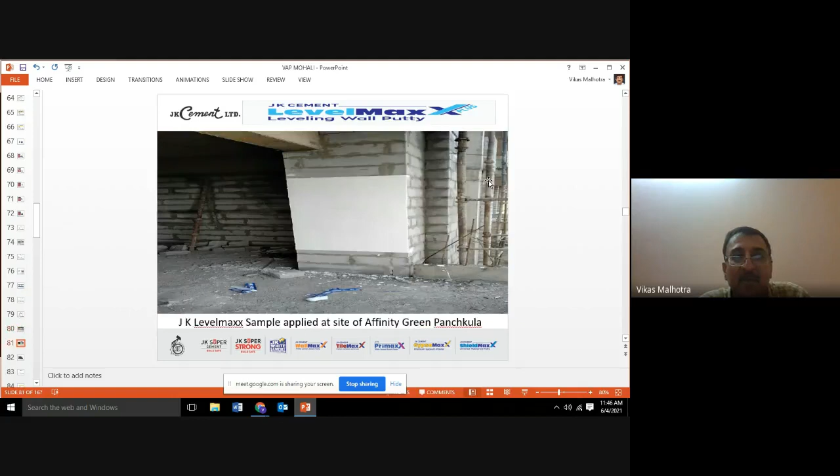Many projects we have done. Again, this product has also been specified in the schedule of rate of CPWD. Here they have defined it as 6 mm plaster on cement concrete RCC work with white cement based polymer modified self curing - they have included all the properties, they just can't write the name. So this is it, and their costing is 205 rupees and 50 paisa.

If you compare it with traditional plaster, there are a number of advantages of my product over them. First, strength will be higher - gypsum plaster, if you compare, is sulfate based and very low in compressive strength. Traditional plaster has variable strength because it is in the hands of labor. This product can be applied both on exterior and interior, whereas gypsum, POP, can't be applied on exterior because it is not a good friend of water. This we are doing on both sides. Antifungal properties are there in my product - with gypsum we don't have any antifungal properties. If you go in for my Level Max, this is my Level Max or coarse wall putty, same thing.

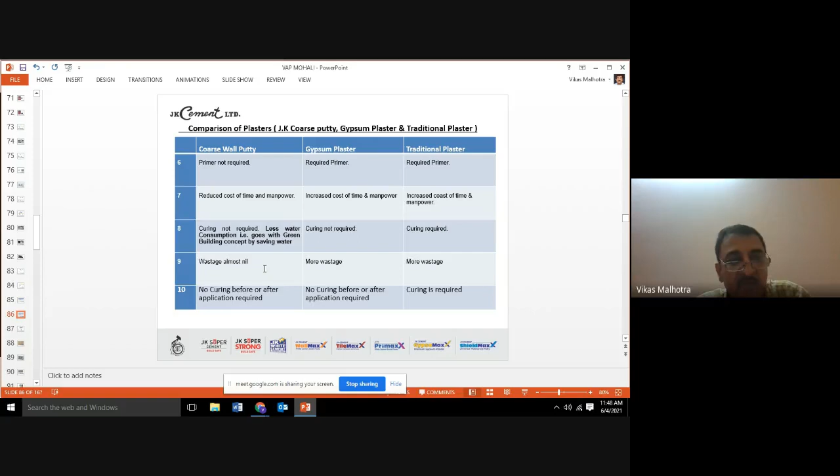We save on the cost of our skim coat also. A single coat of skim coat will do on this product, whereas we require 2 coats in traditional plasters. It will be more durable because it is cement based. Primer is not required for further painting. Reduction in cost of time and manpower. You will save on water, which goes with the green building concept. Wastage is almost nil, and no curing is required. So these are all the advantages.

Now next take up is JK Primex, friends. This is a substitute of your primer. If you want to paint any cementitious surface, as an engineer you know, whenever you want to do painting on any surface, we have to apply a primer. For cementitious surfaces, till date we are getting acrylic primer from paint companies.

Whereas in my product, it will actually move into this, because it is cement based, it will have good adhesion with all these pores. It will actually move into these pores. It will make the surface more smooth and give better adhesion with your paint.

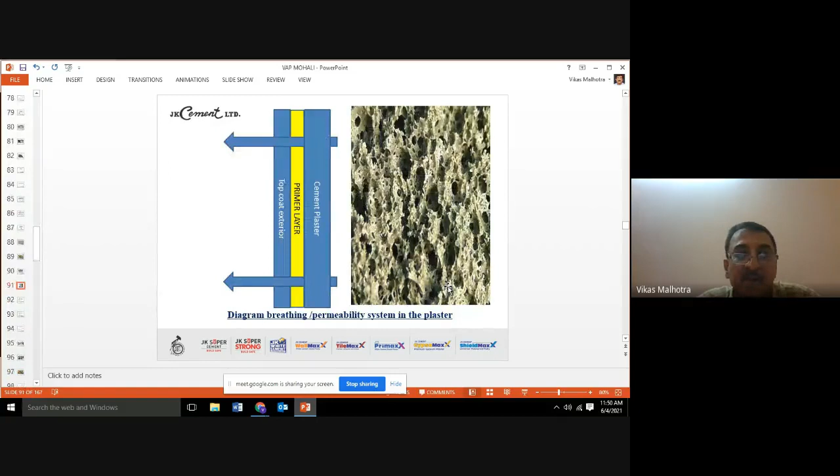It is breathable, which is a basic requirement for any primer. If you talk of specifications, it is very high on whiteness. Why have we given high whiteness? Again, it has to hide the base, so whiteness is very high. Fineness is also very high, because this should actually move into the pores of your plastered surface, as I have explained. So fineness is kept high. Bulk density is low because it's a fine material.

Viscosity is this much, and it has got a very good coverage, 96 to 100 square feet per kg. It comes in powder form - you just need to add water. The proportion is 1:1, one part of powder JK Primex and one part of water, and you can apply it with the help of a brush or a roller.

Now talking of costing, it comes in a bucket of 10 kg, with two pouches of 5 kg each. The cost of that bucket is normally 950 rupees. This is how we have worked out the entire thing. The material cost for two coats is 2 rupees, and labor cost, since it is just a simple brush application, is 1 rupee 50 paisa. Overall cost is 3 rupees 50 paisa. This is very much comparable with your acrylic primer, but with better quality.

Now, if you compare it with traditional lime wash, this can very well replace your lime wash. There are many areas, friends, today also, specifically in rural areas and even urban areas, where we are using lime wash - basement areas, parking areas, boundary walls. So there, instead of lime wash, you can directly use Primex. You can add any stainer into it, and it can give you any color also, and the advantages are immense.

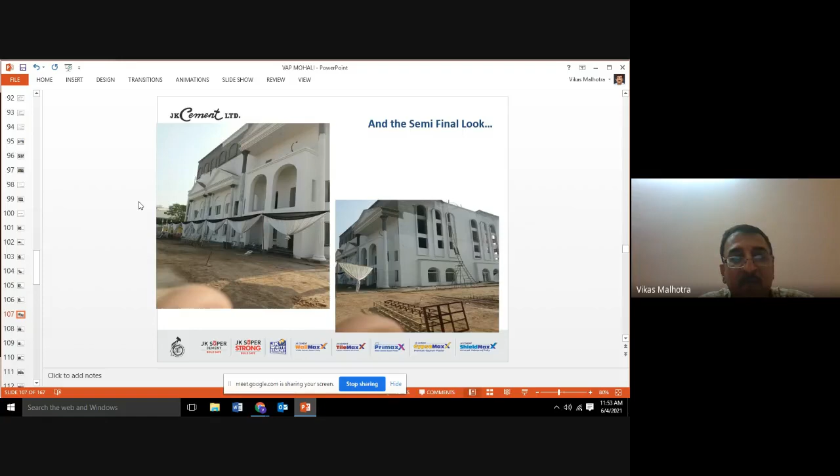This plaster will get full strength, and where you are saving is by using the same scaffolding. You have applied a coat of PrimaX also over the plaster that's been done. You can see plaster has been done only till here, and they have applied a coat. Same way, scaffolding has been shifted, and they have done the entire building. So by the time you have done the plaster of this building, one coat of primer has also been done to protect your plaster.

Many areas we have done this, just running through quickly. It can be done in any color also. Here they wanted to put some glass panels over it, so they have added blue stainer. So this is it.

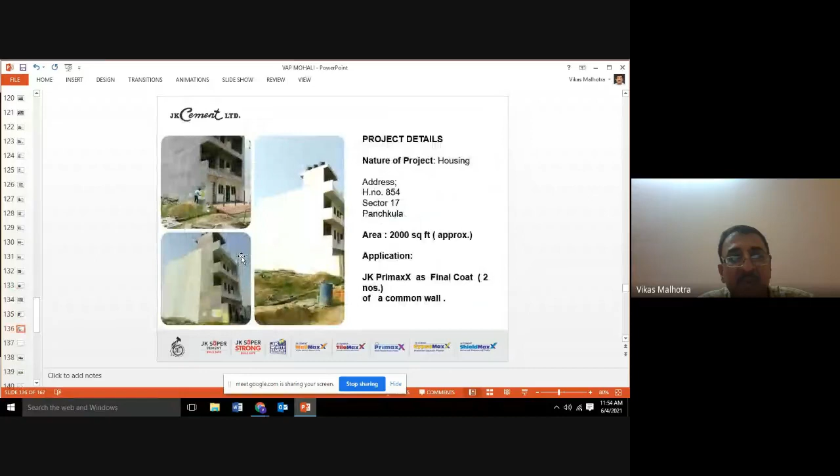Just running fast so that we can come to the next projects. It is here, being applied with the help of a roller. This is the bucket, a 10 kg bucket, which has got two packs. These are many projects we have done with this. Now, next product is GypsoMaxX, friends.

GypsoMaxX is nothing but a gypsum-based plaster, and this is basically given in two forms. The first one is GypsoMaxX, which is a normal replacement of your POP. The whole story revolves around the purity of this product. There are many brands available in the market, but very few are conscious about quality and purity. We have given very high whiteness, which is only possible because of high purity, and we give a smooth silky finish. No curing is required.

This is for interiors only. You should not apply this product for exterior, as it's not good against water. This is how we apply it, and see the whiteness.

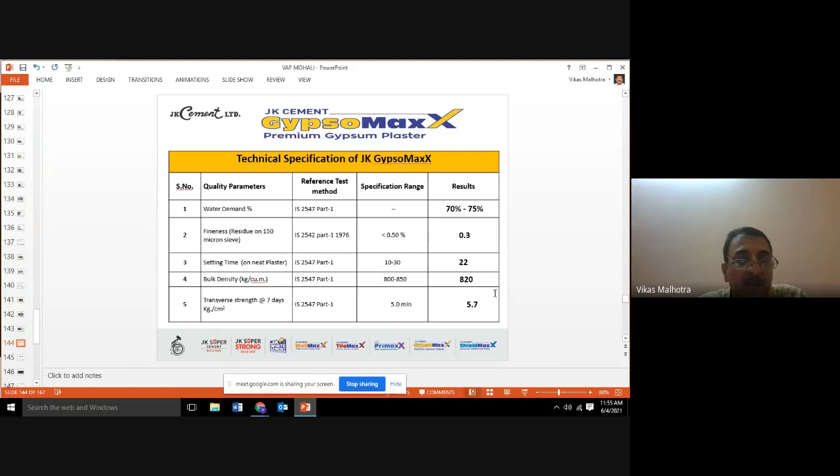Specifications: water demand is 70 to 75%. Fineness is 0.3. Setting time is around 22 minutes. The higher the setting time of this product, the better it is, because the applicator wants some time to apply this product. This sets fast, very, very fast, so they need some extra time in which it should remain in plastic stage. So we have tried to give that. And the transverse strength is around 5.7 kg/cm².

If you talk of costing, again, a 25 kg bag is 280 rupees, which is around 21 to 22 rupees per square feet. That's very much comparable with your traditional plaster. Out of which 10 rupees is the labor and almost 12 rupees is your material cost. Many buildings we have done with this.

Now, friends, this is an enhanced version of your traditional gypsum plaster. We call it one coat gypsum plaster. Why one coat? Because if you want a thicker application, normally POP was applied in two coats if the thickness is more than 15 mm. But with this material, you can go beyond 20 mm in a single coat, because we have added some material in this, perlite based, not only vermiculite based, that increases the thickness, plus some other features. It will make it fire resistant, thermal resistant, and since it's one coat, it will reduce construction time. The whole plaster can be done in a single coat.

As far as specifications are concerned, they are almost the same as GypsoMaxX. Water demand is the same, fineness is the same. Workability time will be more, it will remain in plastic stage for 2 more minutes, and the transverse strength is the same.

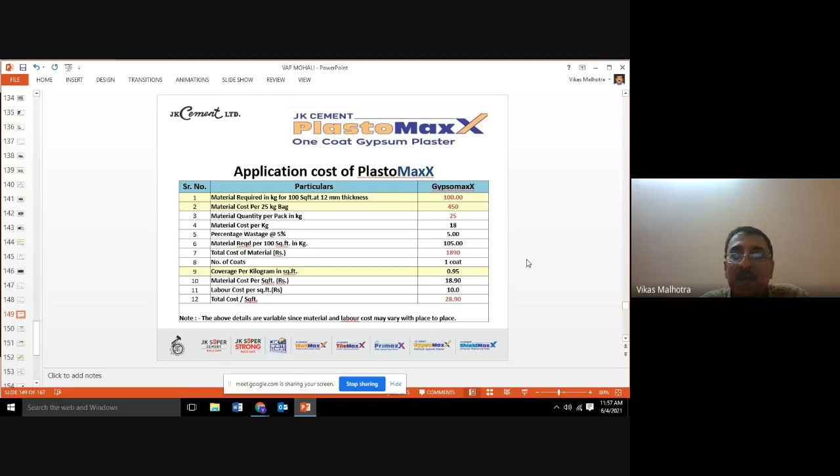If you talk of costing, since I have added something in it to give more properties, the cost has increased to 28 rupees, compared to 22 rupees earlier. Application cost is the same at 10 rupees, but material cost has increased to almost 19 rupees. So this is regarding PlastoMaxX. It has got good fire resistance also. So this is a substitute, but the limitation is that it can be applied only in interiors, not exteriors.

Now, friends, this is a product, BondMax, as I've told you, this is a bonding agent. If you want to do plaster on your RCC surface, any RCC surface, you have to do hacking on it, because plaster will not have good bonding with smooth RCC work. While doing RCC work, every engineer wants it to be as smooth as possible, but the problem comes when we try to do plaster over it. So we have to do hacking. So we have given a solution, because if you are doing hacking, you are actually playing with the strength of that concrete wall. So we have given a ready mix material under the brand JK Bond Max.

This is in liquid form. You can apply it with the help of a roller or a brush onto the surface. It has got some coarse material in it, which will give you a textured green color finish. It has very good mechanical and chemical bonding with the surface, and its drying time is only 6 hours. Once you've applied this, after 6 hours, you can go in for plaster.

So here, as I've told you, we have worked on various parameters. What we are saving here is time. Hacking cost is almost the same as this product, but hacking is a very time consuming exercise. Whereas with this you can save time, and quality also will be ensured, because hacking will be done by layman labor and won't be uniform, whereas this is a very uniform textured finish you will get.

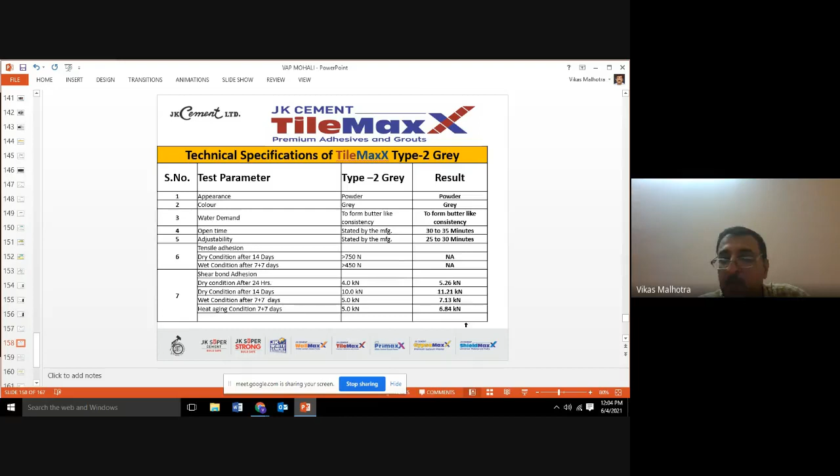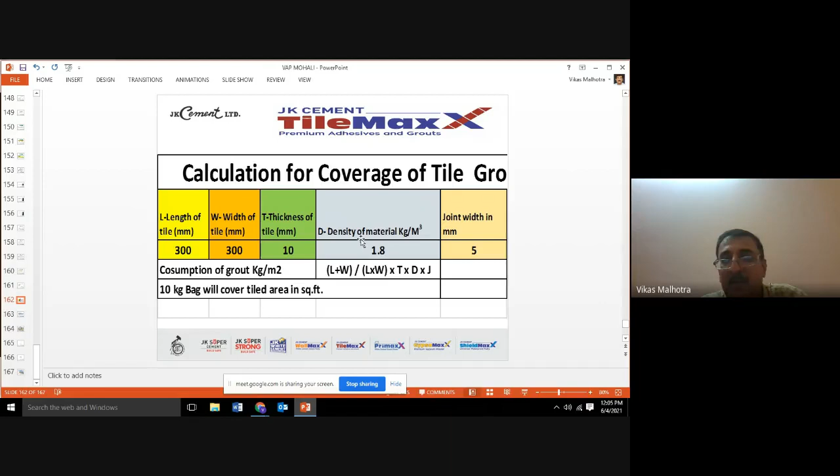Then we have some grouts also, friends. This is epoxy grout and cementitious grout, both we are into. And these are the materials which are used to fill the gaps between the tiles. Earlier we were using cement only. So these materials, this is how we calculate the requirement. This is the length of your tile, this is the width of your tile, this is the thickness of your tile, the density of the material, the joint width. And that's how we will get how much quantity of material is required to fill the grouts.

Thank you, friends. That was all regarding these value-added products. My suggestion to all of you is that you should keep yourself abreast with the new technology products which are coming in the market, whether you are in academics or whatever field you are working in, so that whatever structures you make in your coming days, you are always able to deliver quality to your clients.

With that, I would request Saurabhji to raise any question if it is there.

Thank you, sir. Thank you so much. That was indeed a very interesting session, because as academicians and researchers, we were exposed to how things are being executed in the field, how the practitioners are using the products, and what products are available for us also in order to use for our studies and from a research point of view. So that was really interesting and insightful.

Sir, there are certain questions which I would like to convey to you. There is a question by Mr. Rajiv Chauhan. He states that JK Cement won the contract for the proposed Mumbai and Ahmedabad bullet train track. Yeah, yeah, it is very recent. So what were the strengths which made you get that contract above all the other competitors?